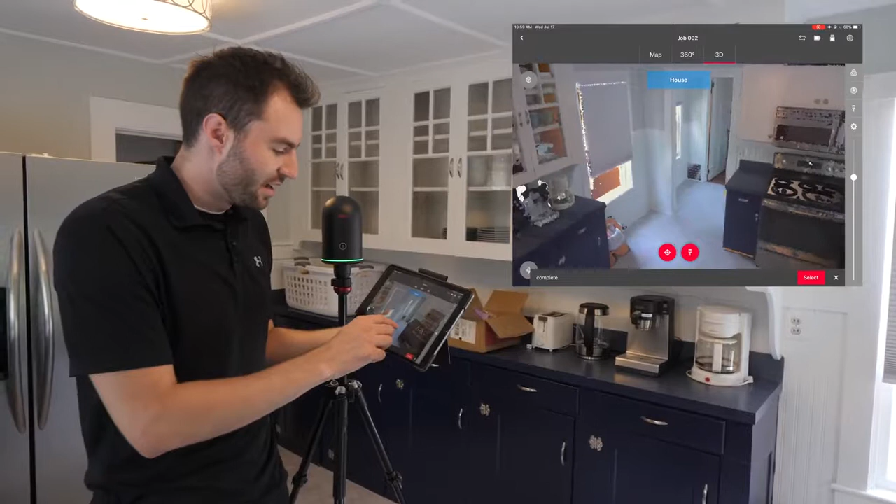And then if I tap 3D, now I can see an initial rendering of the 3D scan data, so I can navigate around. This isn't the final full quality data, but all the full quality data will be transferred over when you transfer this project to Register 360.

So this looks good, I like my settings. Now I can go back and start my next scan. So now what I need to do is move my scanner to the second spot here.

I'm going to tap on the target again to start a new scan. You can see that it used my initial name, house, and then added a 1, so it's going to iterate through the name if you want.

I like those settings, so I'm going to keep them the same, and I'm going to press play to start another scan. The second scan just finished up and transferred over, and you can see I have 2 different setups here.

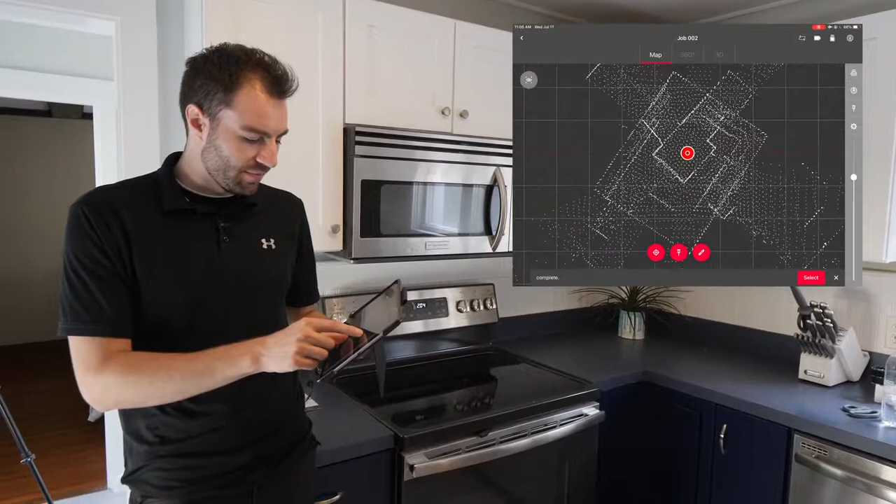Initially, they're just going to be dropped in the middle of my coordinate system at 0,0, but I can tap on one of them and drag them around. I can tap on this circle and kind of orient them in the right way, so I'm going to tap on this one and see if I can somewhat align the two.

Now I want to register these two together. If I tap on this right hand button down here, that's the link button. It already has one setup highlighted, so I'm going to tap on the second one, and it's going to give me a dotted link line between them.

I'm going to tap start alignment, and you'll see one scan is orange and one scan is blue, so you can make sure that they're pretty well lined up. Then I'm going to tap optimize, and that's going to snap the scans together in the right orientation.

I can also check to make sure that these are oriented vertically using the button at the top here. Everything looks good, so I'm going to tap create link. Now it's going to lock those together into one bundle, so you can see if I rotate this, those two scans are just locked together.

Now if I tap on the bundle and tap 3D, now I can see the whole 3D point cloud bundle. I can navigate around to make sure I've captured what I need to.

The next thing I want to talk about are tags. Tags are a way of adding non-scan data to your scan project. You can see the bottom button in the middle is the tags button, and I can add tags in a bunch of different formats. So I can add an image, a video, a file from my iPad. I can add an audio recording or just simple text.

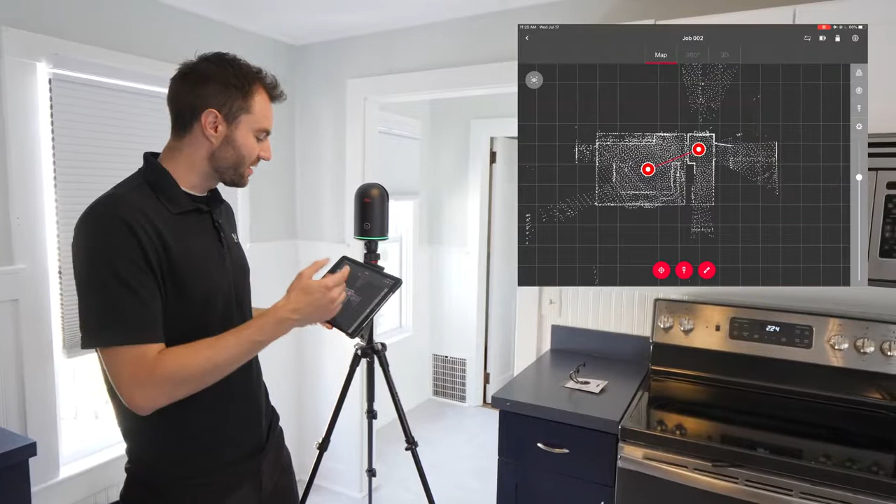I'm going to go down just as I'm starting a new scan, but this time I'm going to go over to the scanner data tab. So now I can see all the data, all the scans that are currently saved on the internal memory of the scanner.

In this case, I just took the one scan, so I'm going to select that one, and now I'm going to tap this download button at the top right. So that scan is going to come over to the iPad, and then I can register it just like I have done so far with my project.

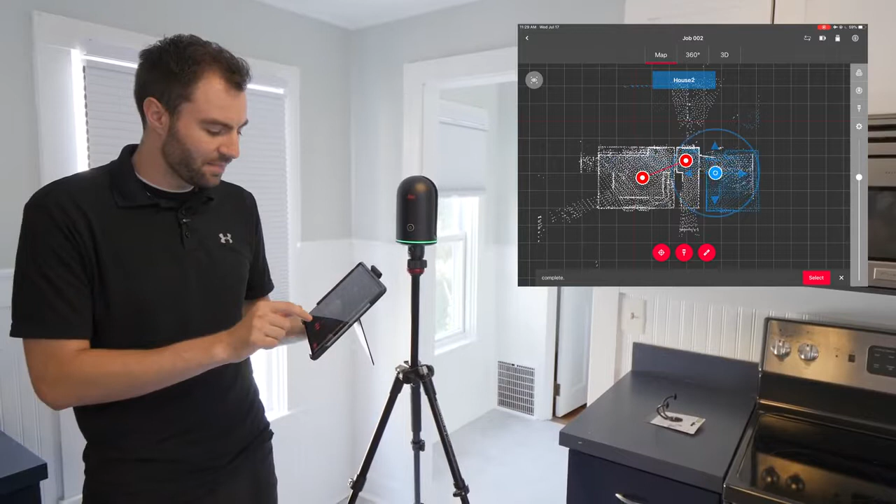When that scan finishes transferring over, you can see it's dropped in the middle of my coordinate system again. I can tap it, drag it over, rotate it around to get it roughly in the right spot, then tap the link button, tap my second setup, and tap optimize. It snaps right into place, and I click create link. Now I have a full bundle of these three scans all locked together.

All right, so I can see that all my data looks really good. That means I'm all done here on site. The next step will be to transfer this project over to Register 360 once I get back to the office.

All right, so I'm back in the office and I've got my entire project on the iPad in Field 360, but the next step is to move this data over to Register 360 on my computer. I need to make sure both my computer and the iPad are connected to the same Wi-Fi network, and then in Field 360, I'm going to tap this little eye at the top right and check Sync Server. This is what I need to do when transferring data over to the computer.

Then when I go into Register 360 on the computer, I'm going to create a new project, and then click on this Field 360 Import button. You have to make sure this IP address is exactly as it's written on your iPad. You can even test the connection to see that the iPad and the computer can see each other. Then I'm going to click Add to Project.

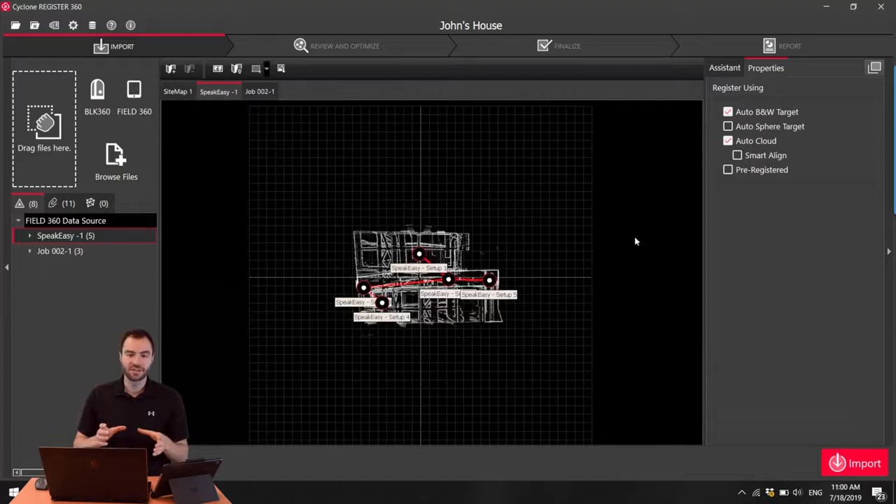It's going to bring in a quick preview of each of the projects you have on Field 360 on the iPad. I can see this is a job I did earlier, and over here on job 2, this is the job I want to import today. I don't need to import the other job, so I can uncheck that one, and now I can hit import, and it's going to import all that data to the computer.

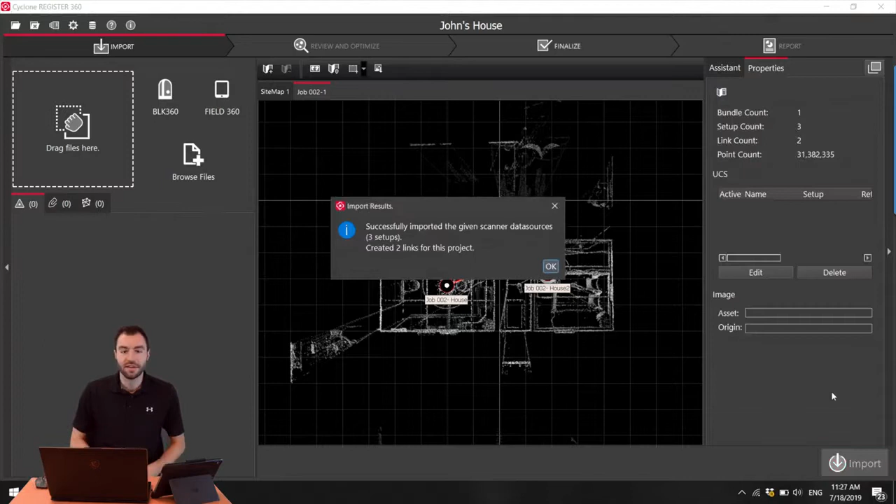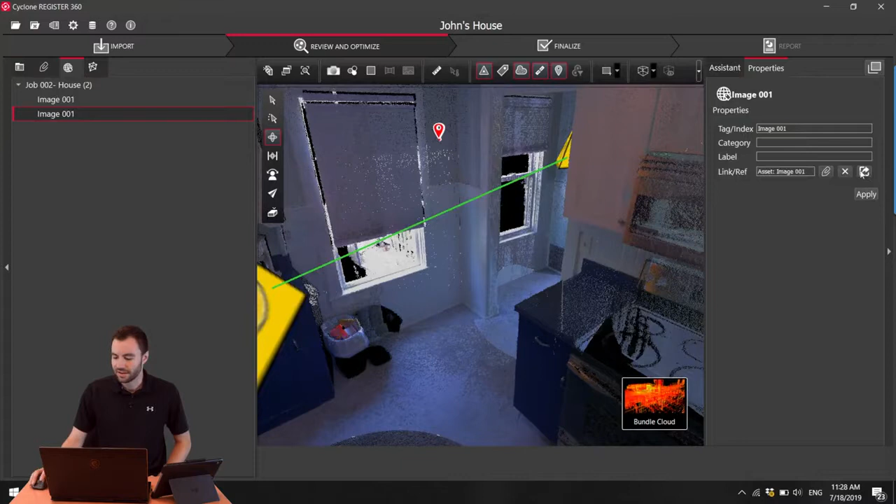All right, once that finishes up, you can see it's imported the data. I click OK, and now I can see all my data is here. I can go into my bundle cloud, zoom around, and now see the full quality data. I can even see this tag that I put in, and clicking this button brings up the picture that I took in the field.

Now I can go ahead and export this out to AutoCAD or Revit or whatever other software I want to use this data in. So Field 360 is a great tool to use on site when you're controlling your BLK 360, and it really speeds up your workflow because you can have your entire project registered together, so there's essentially no work to do once you get back to the office.